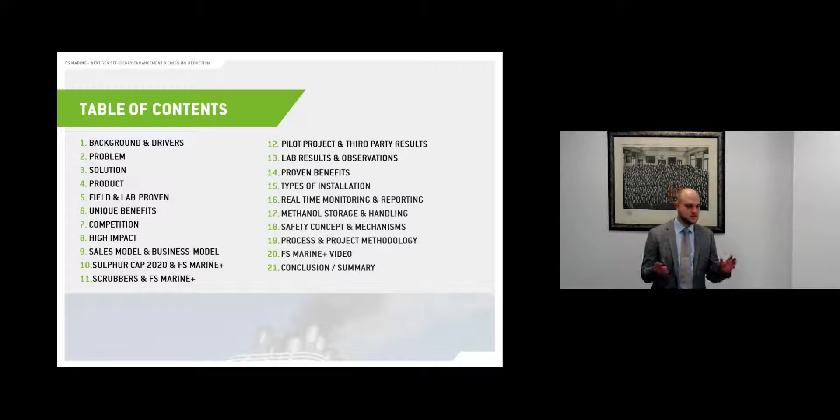The table of content is very long. I'll try to stay within the time budget, and I'll go over some things maybe a little bit more quickly than others.

So this is a brief overview. The application consists of a hydrogen generator in combination with a methanol water injection. We reduce fuel consumption by 10 to 15% - that is a net value, I'll go into the net value calculation later in more detail. We reduce emissions drastically, but you'll get figures later on. We also reduce engine wear and tear, and of course increase the operational profits of our customers.

That's the reason for them to buy it, because shipping companies are green - of course they like to be green, but they won't pay for being green. So it's all about economic aspects. Our vision is to become a leading supplier for efficiency technology retrofits and to establish a sustainable solution that has a clear economic and ecologic benefit for the customer and of course then for us all.

The solution itself can be retrofitted, which is very important to know, because we wanted to create a solution that is available today. We have a fleet of 55 to 60,000 vessels, numbers vary, but that's the range we talk about, and we need retrofit solutions that pay for themselves. Otherwise we're not able to do anything about the existing fleet, because every new build ship is a measure that will take its part in 5 years, but not today.

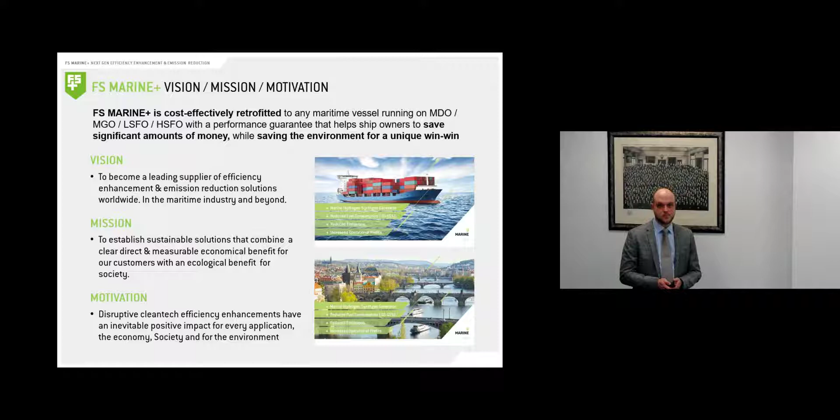Of course, shipping is very important. It's the backbone of global trade. I don't have to tell you that. We have to reduce CO2 emissions due to regulations, and ships have to become more efficient. So that's the regulatory drivers and background.

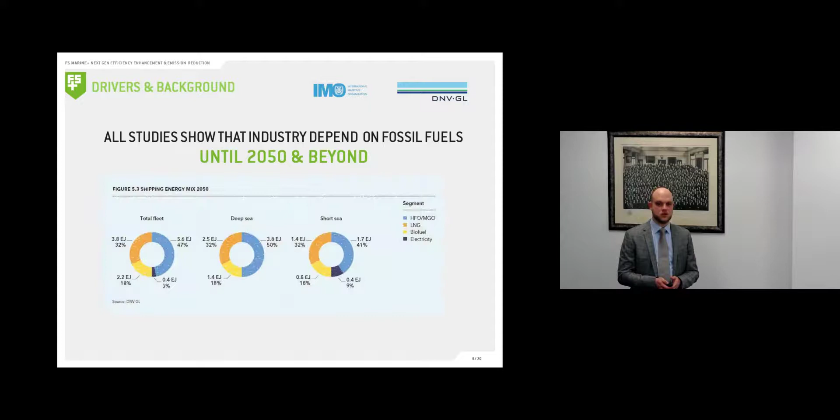I'll talk a bit about the global sulfur cap, just from an economic point of view. Of course, you know all what it's about. Current studies show that in 2050 we will still be dependent in shipping, and every industry, on fossil fuels, meaning heavy fuel will still be part of it. So we need solutions that tackle fossil fuel consumption in shipping today, but also in 20 or 30 years.

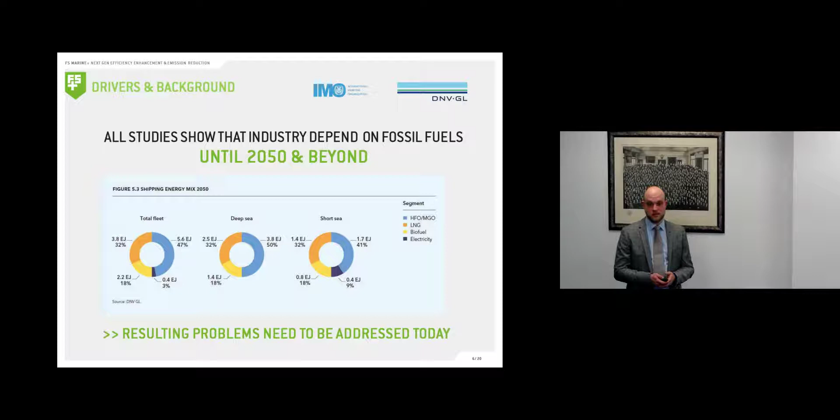So what problems are we addressing? Of course, it's fuel costs. We've seen it in the last months, fuel costs are still rising, which is good for us because our business case gets better every day. We have climate change, global warming, and of course air pollution, which is one of the biggest, maybe even underrated, problems to general health all over the world.

Of course, burning fossil fuel is not a solution to anything. So we want to tackle the problem today, at least improve the consumption or use of fossil fuels on marine engines today.

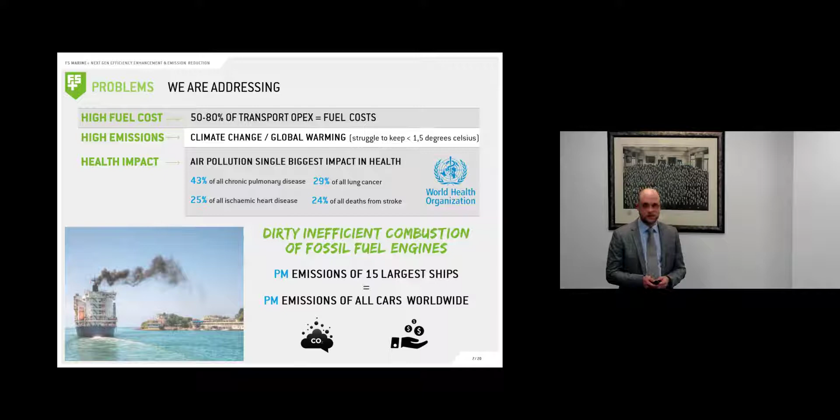So the solution itself generates hydrogen on demand. That's very important, and I'll go more into detail later on. It injects the hydrogen and oxygen together with water methanol into the air intake of the engine, in different parts of the engine. This will most likely raise more technical questions from your side later on.

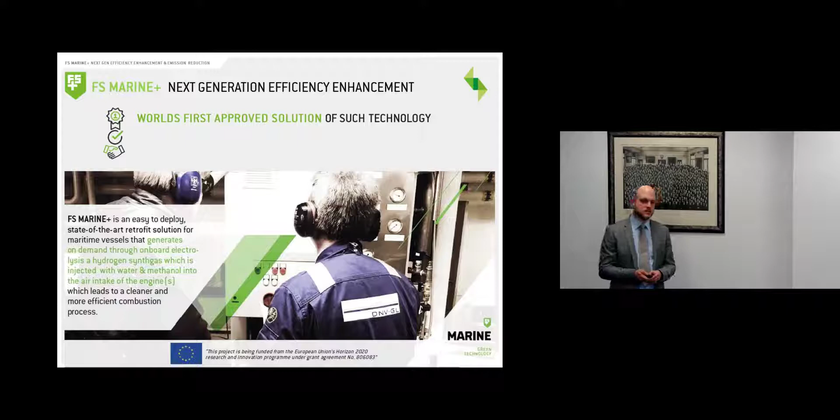It's the world's first approved solution in that regard — DNV GL as class has given us a testing approval for the first time, and for the second time the testing approval has been prolonged. It's of course patented, that's the capital we have beside the solution, patented in over 40 countries now.

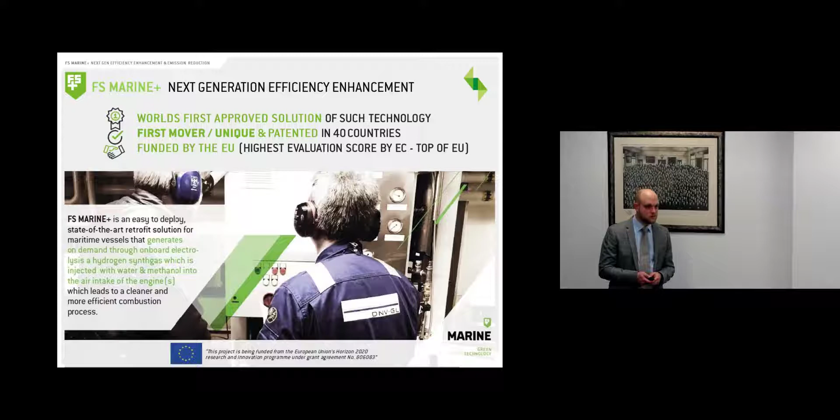And at the end of last year, we received EU funding from the Horizon 2020 program, which is very hard to acquire. Maybe some people here know that. So the interest from the EU side is also generated and valid.

So how does the solution work? As I said, we inject hydrogen and oxygen. The gas is generated via an electrolyzer, a quite efficient electrolyzer, because of course we want a very good energy balance. At that point I have to make clear that we do not replace fuel by hydrogen.

That's one of the questions we normally receive, and it wouldn't make much sense. Everybody knows, of course, if you generate hydrogen by power generated from the engine, and feed that hydrogen back into the engine, it wouldn't make much sense. We only use very small amounts of hydrogen — about 0.1% of the air volume going through the air intake to the engine — to already create very positive effects.

The hydrogen and oxygen is supported by a methanol water injection into the hottest part of the air intake behind the turbocharger, and by that we cool down the air intake temperature. But I'll go more into detail on that later on.

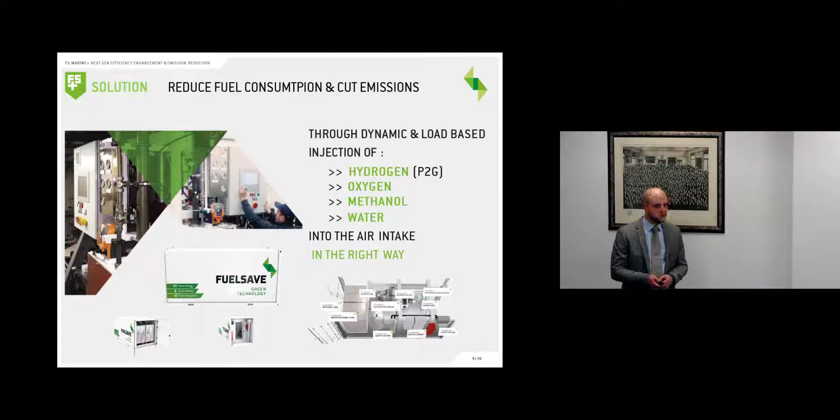That's what the containerized solution looks like, but you'll get an impression of that in the video later on. Of course, the whole system has to be integrated into the ship's network, into the alarm system, ventilation system, freshwater system, and the methanol storage system.

That's what you see on the left side. In the middle are the different parts of the system. We have the security control, or the PLC control, that is controlling all the processes of generation of the gas, injection of the liquid, and the mixture of it. There's also a demineralization unit integrated, because for the electrolyzer we need very clean water — there's probably a better technical phrase for that, but we need very clean water for the electrolyzer.

We have a small intermediate tank where the methanol and water are mixed. Right now we are operating with a mixture of 30% methanol and 70% water.

That is injected via a high performance injection pump into the air intake. So the gas component, the hydrogen and the oxygen, are given into the air intake passively, meaning somewhere near the filter system where we have a low under pressure. The engine takes it in itself, while the liquid has to be injected, because we are in a pressure bearing part of the air intake system.

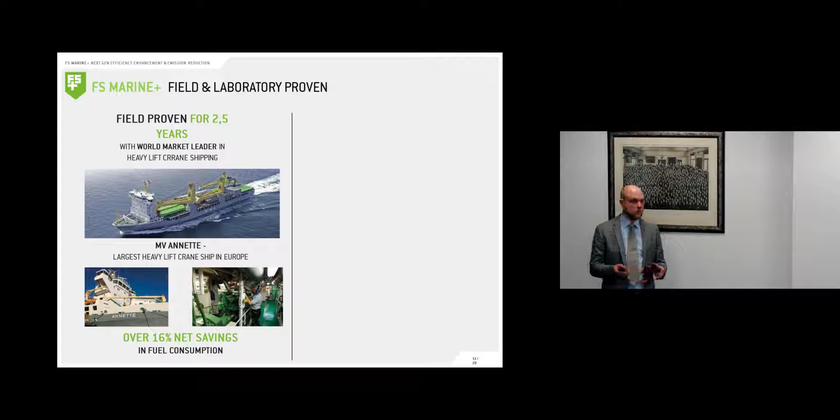The system was installed on an auxiliary setup there, on a Volvo Penta auxiliary engine, and depending on load level and operating conditions of the engine, we had up to 16% net savings in fuel, meaning we had larger gross savings of up to 25% on part load level on that engine. Net savings in this case means really financial net savings, meaning we've taken into account the consumption of methanol, the consumption of power, even we balanced the consumption of water. So all operating materials were taken into account, and we had really great results to go on.

The solution was also tested, the working principle, not the system itself, but the working principle of using hydrogen, oxygen, water, methanol on a combustion engine, was tested at the University of Rostock. They have their own institute for the industry, which is called FVTR. It's quite renowned in Europe, one of the marine centers in Germany. So the bigger engine manufacturers like MAK, MAN are testing their oil additives or injection systems there. We went there and had our working principle of the solution also approved and validated.

The biggest benefits for our customers are, of course, the fuel savings. In the end, it's about money, and we can contractually guarantee 10% OPEX savings. That is where we are positioned now, and where we create the interest on the customer side. As we have very good results on different applications, not only on ship engines, but also on truck engines and even on biogas plants, we can guarantee the customer the ROI.

This is a brief overview of the net savings and the emission reduction potential that we have with the solution. We have already spoken about the net fuel savings, up to 16%. We have SOx reduction, of course, in the same amount as we reduce the fossil fuel, so this is 10%, and by replacing a little part in the energy balance of the fossil fuel, HFO or MGO, by methanol, we can reduce the SOx by up to 20%. Of course, this is not enough to meet the requirements for Tier 3 or to replace the scrubber, but it's a good value for itself.

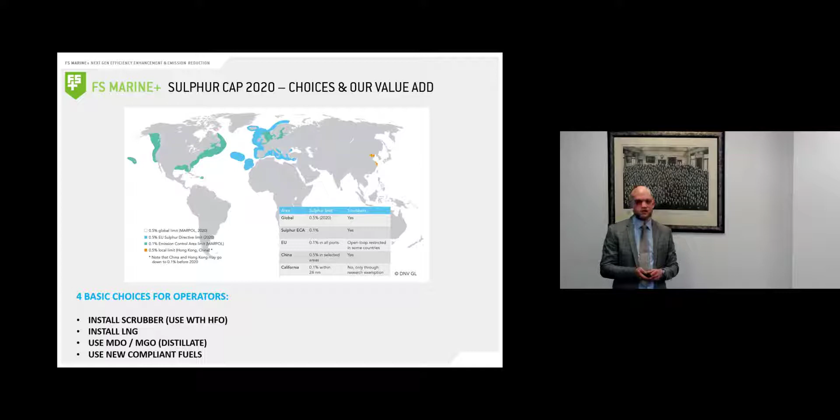You all know the Sulfur Cap 2020. I'll go through this quickly because it's more related now on the customer side. But as we know, you don't have many options to meet the requirements. Either you buy a scrubber or you use low sulfur fuel oil. These are the two options you have, or you just do nothing and wait and see what happens.

Yesterday I was at the tanker and shipping conference, and many people are laying back and just waiting to see what happens with 2020, because there's a big uncertainty about prices. Nobody knows the fuel prices.

And also everybody knows a scrubber has a tendency to increase fuel consumption. So it's not an economic solution in the first part. It also has many costs and maintenance costs later on.

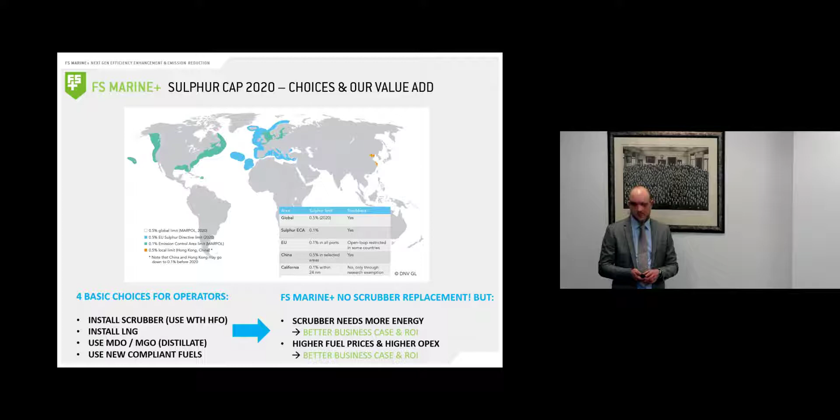For our solution, it doesn't matter which way the customers go, because we already start at the point where the costs are created, which is the consumption of fuel itself. So if you use HFO with a scrubber, distillate fuel, or low sulfur fuel, our solution works with any kind of fuel, any kind of liquid fuel. We even have positive effects on LNG engines.

Especially in the reduction of methane slip. Everybody knows that methane slip is also one of the biggest unhealthy factors regarding LNG. From my personal point of view, that's the reason why LNG cannot be part of the solution for shipping in the future.

Scrubbers can actually benefit from our solution, especially a closed loop scrubber - we all know what an open loop scrubber is. If we go for closed loop scrubbers, if we reduce the amount of exhaust gas and the amount of emissions that have to be cleaned by the scrubber, then we could reduce the wastewater treatment unit and make a scrubber less expensive, a little bit smaller, and in that regard have a better ROI if you anyway plan to invest in a scrubber.

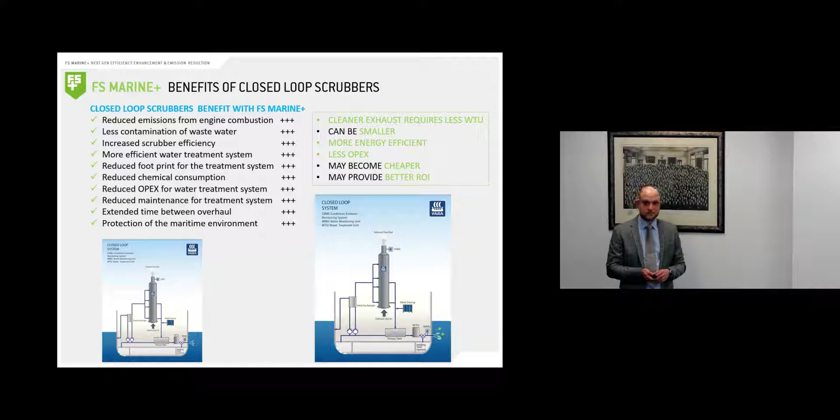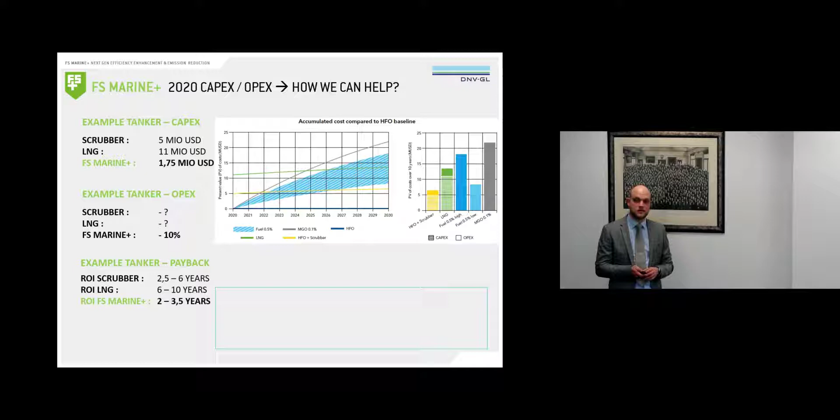Okay, I think we have to speed up a little for the first part. So it's just what I said - a scrubber costs money, and the return on that money is uncertain because you don't know what happens to fuel prices in the future. While an investment in our solution, you can always guarantee an ROI, so there's no uncertainty no matter which way you go in the future.

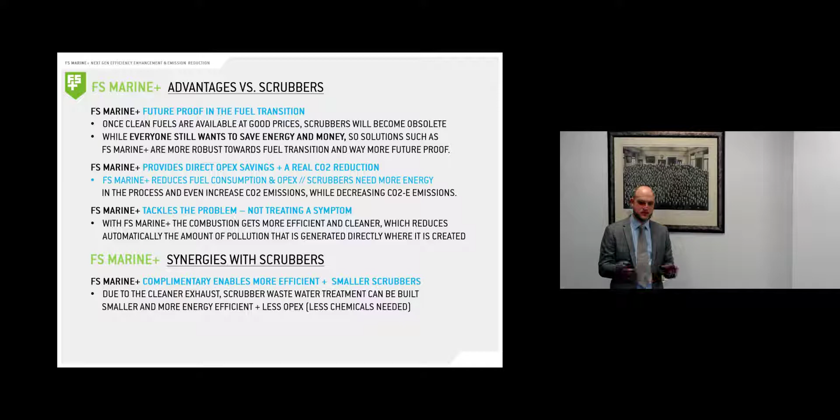In general, only one sentence on that - we tackle the problem: the generation of emissions and fuel consumption at the combustion itself. Every other system is just treating the symptoms.

Actually, to be honest, maybe I'll skip the video. It's fine.

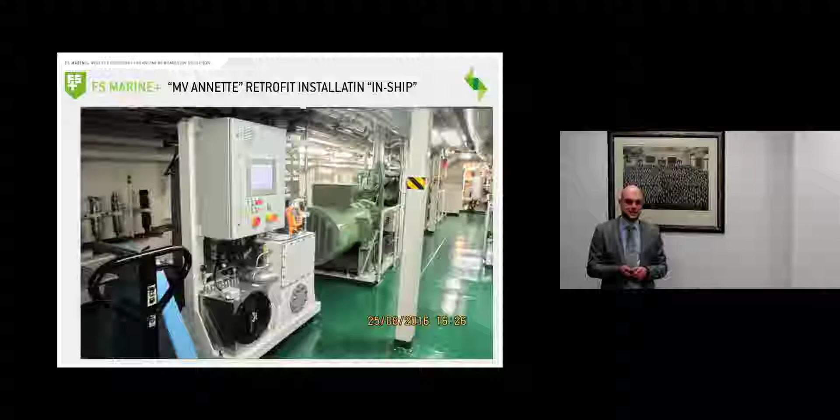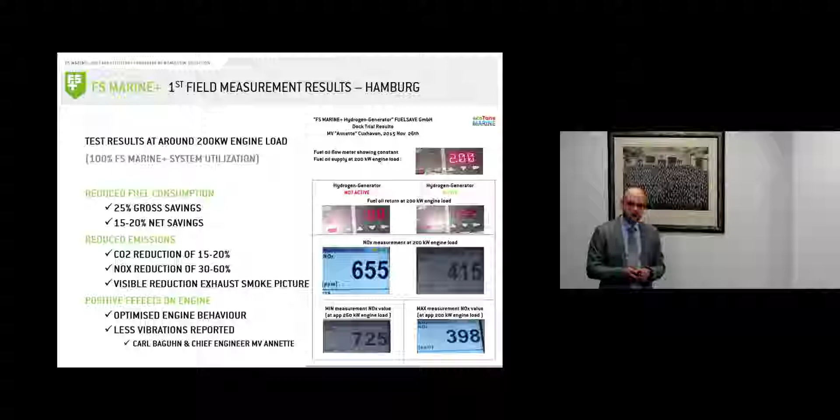This is a short overview of one of the first testings we did in real operation on the ship. We had 25% gross savings and about 16% average net savings. We also did, of course, emission control and emission monitoring. We had a huge reduction of NOx and CO2 in accordance with the fuel reduced.

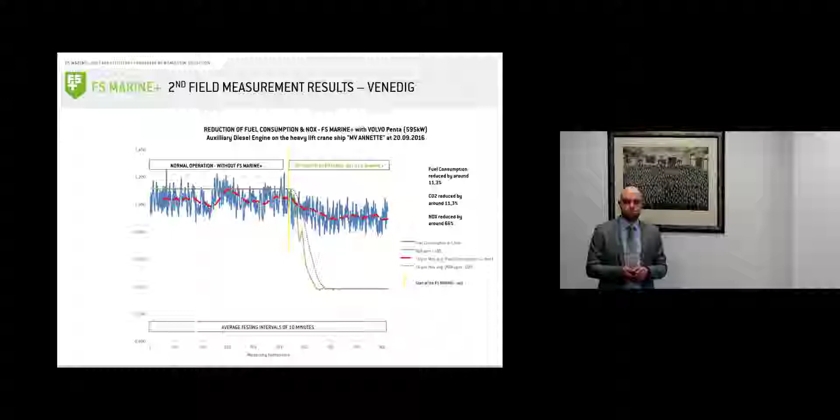This graphic shows the improvement of fuel consumption when the solution was activated. At that measurement we had about 11.3% in fuel consumption improvement and 66% in NOx reduction.

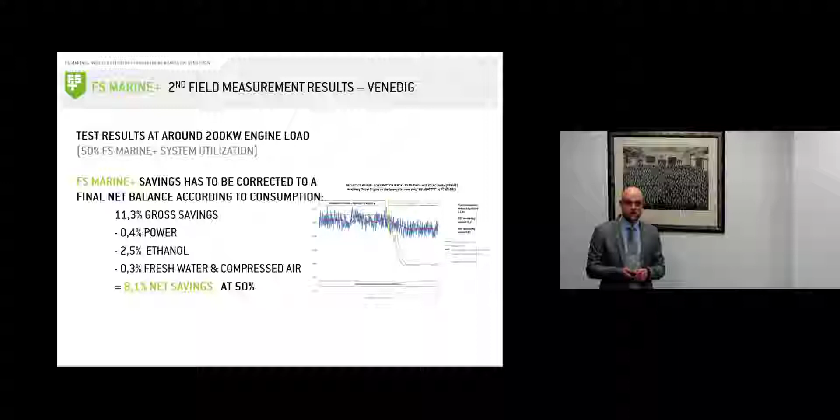We also did oil analysis, which is quite interesting. The oil on this engine had to be changed every 500 hours due to fuel intake into the oil, fading its quality. After our system was installed, the oil quality improved after only 50 hours. So the oil could be used for more than 3 times the original interval of 500 hours, meaning it was used for 1500 hours and was still okay.

Not perfect anymore, but still good. As you know, the oil shows the operating condition, the inside condition of an engine. That has proven the positive effect of the hydrogen by cleaning

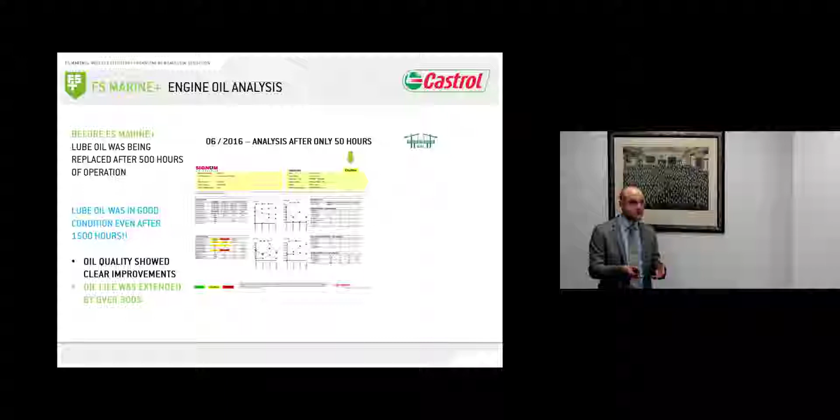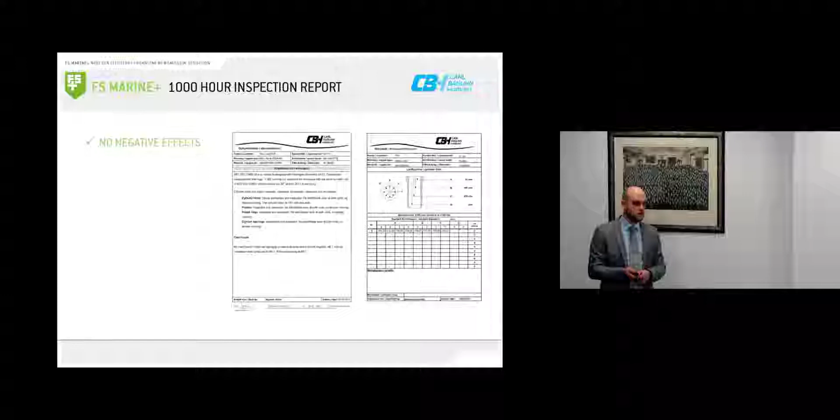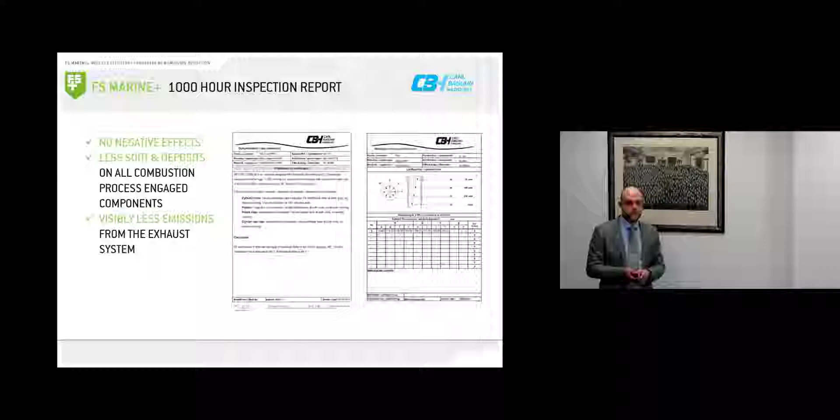almost all residuals, all combustion residuals inside the engine. This has been verified by an inspection from Carl Baguhn, the Volvo Penta servicing company of the customer. They opened up the engine, did the inspection as usual, and saw no negative effects on the engine, but tremendously reduced soot and deposits inside. The engine looked like new from the inside, and of course there were visibly less emissions from the exhaust, with reduced black carbon.

That is a statement out of the inspection report: cylinders look like new. Here are some pictures, maybe they are more convincing for you as technicians. For me they look good, but I think you have a different view on that.

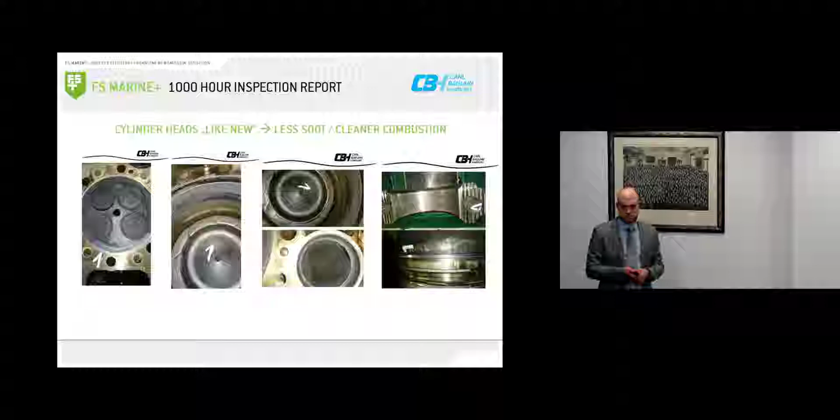That is what the engine looked like from the inside after about 1000 hours of operating our system. And nothing was cleaned, it's like it was opened up.

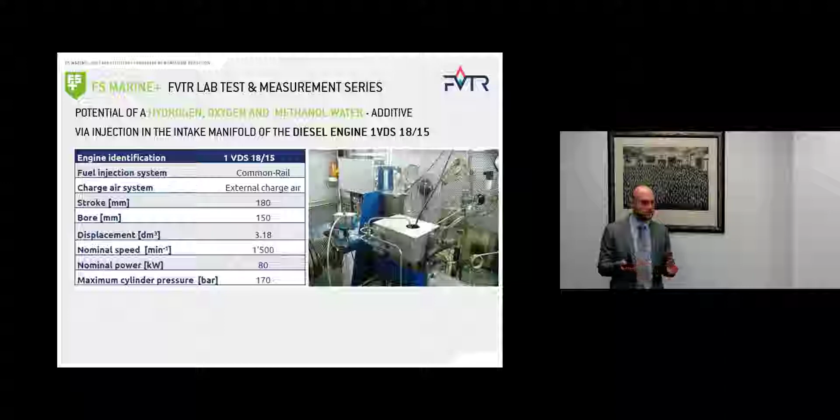We also did laboratory testing, as I already explained. That has been done on a single cylinder unit at the University of Rostock. Maybe the figures are more interesting for you. The single cylinder was a 80 kilowatt engine.

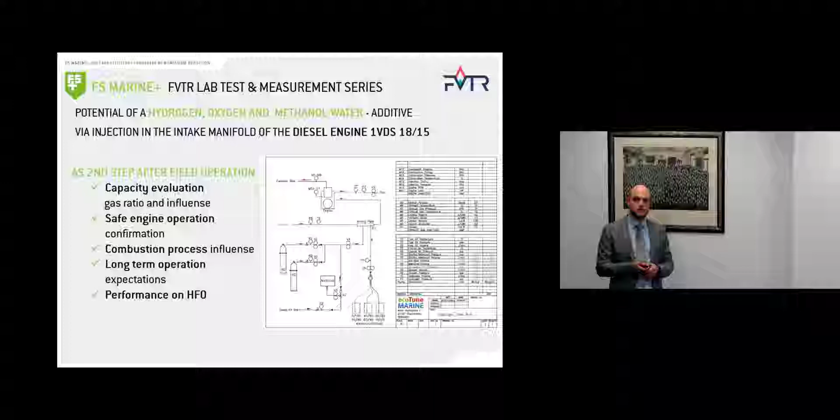We tested the working principle, meaning we had no system there, but the oxygen and hydrogen came from a bottle, and methanol and water were injected. We tested it on a huge range of different operation points of the engine, and tested it also to extremes—what happens when we inject much hydrogen, less hydrogen, only oxygen, in combination with different ratios of oxygen and hydrogen, also with the water and methanol.

So for us it was kind of a development boost. We could test many things that we could never have tested on a customer engine.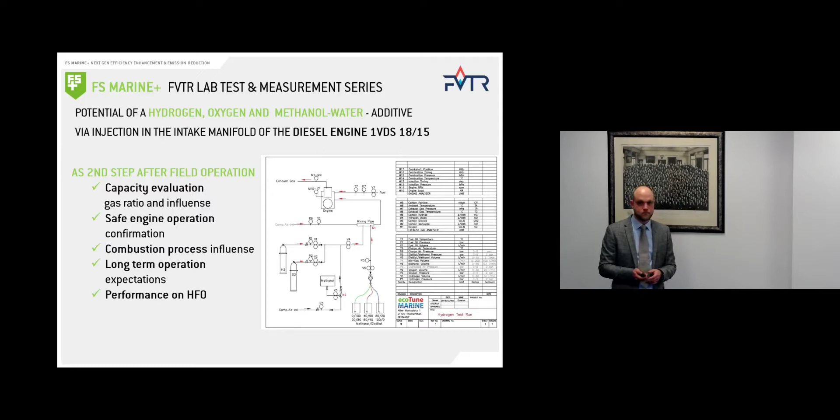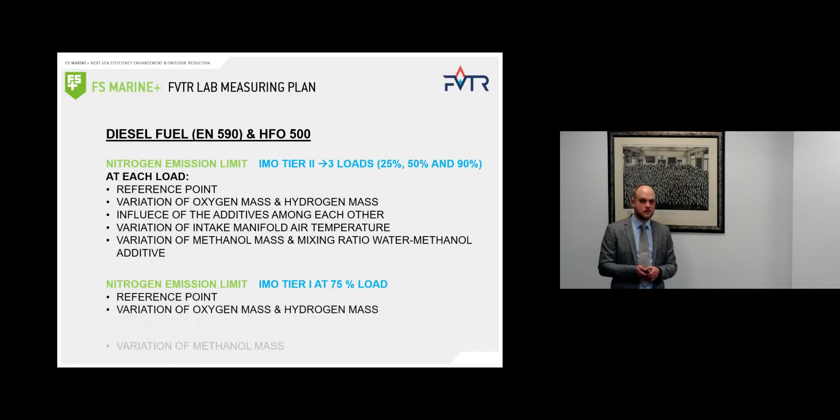So we had variation of oxygen mass and hydrogen mass, with a fixed set point in the beginning, and we tested the whole range of different mixtures over that one set point.

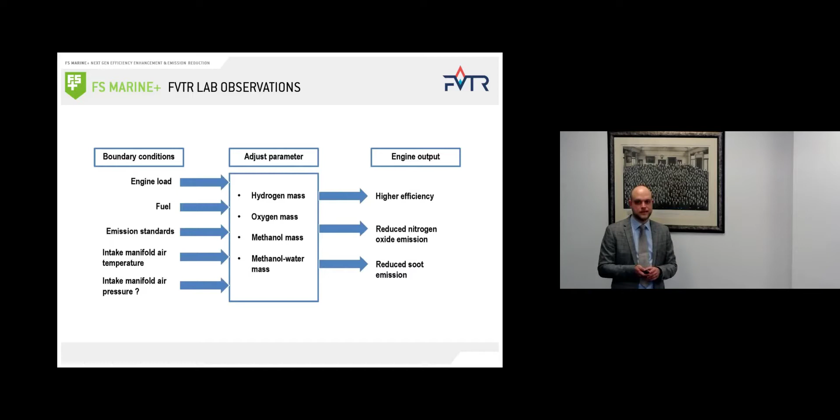What has been observed? I know this is very technical, I'll come to the conclusion right away.

We had reduced diesel consumption, of course, reduced nitrogen oxide, reduced filter smoke number, as described in the beginning. We had reduced intake manifold air temperature, up to 50 degrees, which has very positive effects on the efficiency of the engine. We also had increased indicated efficiencies. So all the tendencies from real operation in that regard were confirmed.

Not to that extent as in real operation, but as far as we know, there seem to be quite differences between single cylinder operation and full engines in real operation.

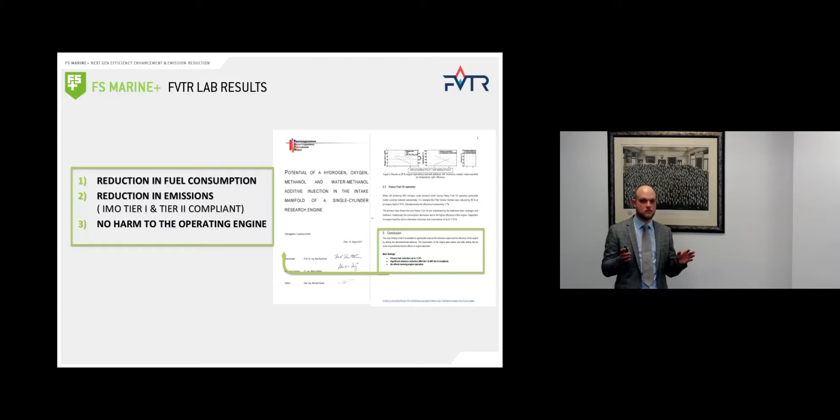For us, most important because it was relevant for the approval of the prototype, and of course for future installations, that we had no harm to the engine, meaning no increase in cylinder pressure or combustion pressure.

So a brief overview of all the proven benefits, or our conclusions from the real operation experience that we made: we have reduced fuel consumption, drastically reduced emissions, reduced wear and tear due to better, cleaner operation inside the engine, we have reduced lube oil costs where it is relevant, and no harm to the operating engine.

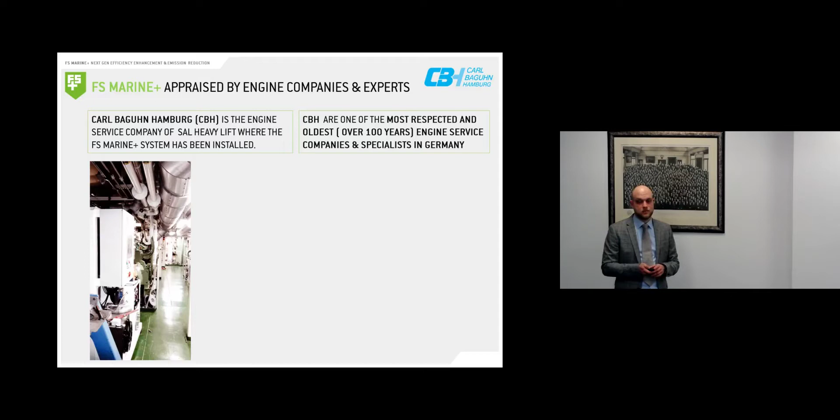So the current customer was so satisfied with the prototype installation that they decided to go for a 4-ship installation. That project has already started in designing and approval, and will begin in April. We hopefully finish the first commercial installation in April 2019.

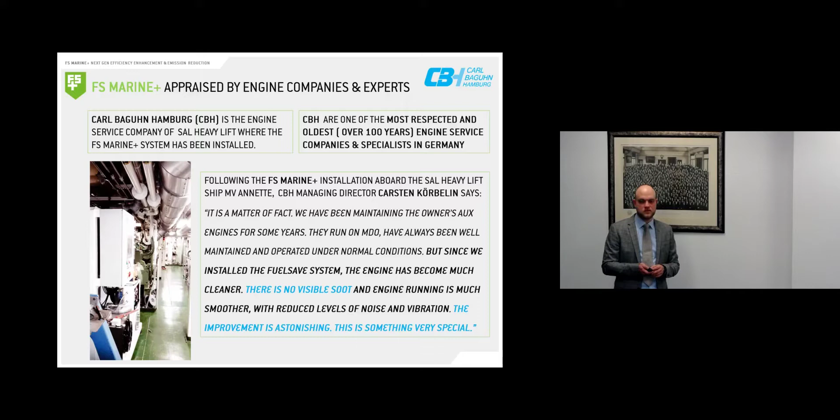This again is the conclusion from Carl Baguhn Hamburg, the servicing company for that auxiliary Volvo Penta engine. I'll go over this quickly.

We have 2 installation options. In-ship installation, of course customized inside, meaning the methanol storage is also located inside the ship. And we have the container solution that you have seen in the video.

Design is finished for the units, but we're still in the approval process. And what I may say today is, of course, the engine manufacturer had to be involved in the process because we are going for the main engine, the propulsion engine. I can say that one of the biggest German manufacturers is supporting the project now.

It took some time to convince the people, but they are doing their part of the hazard analysis for the approval process, so we can now really proceed with the support of the engine manufacturer on the installation.

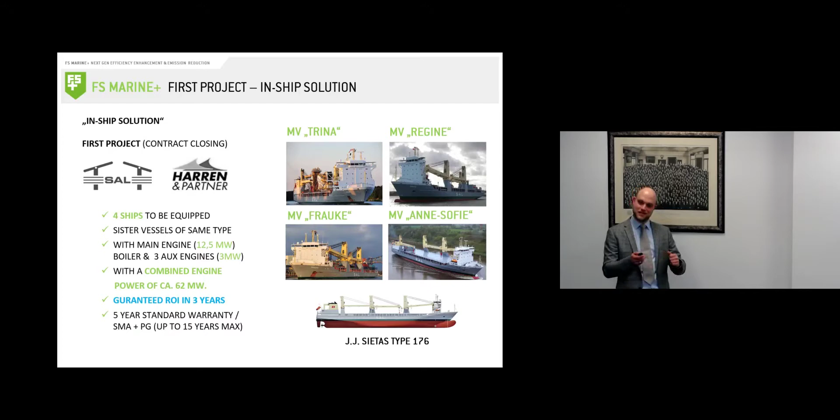That's a question, normally the first question we get. The first one is, are you replacing fuel by hydrogen? And the second one is, okay, if it works, what does the engine manufacturer say?

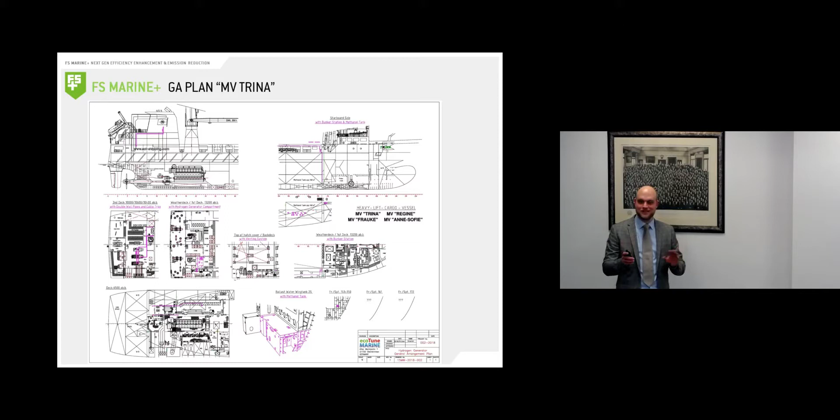So, who's familiar with the general arrangement plans here? Who is the electrical part inside here? Okay, so I can only show the picture. It's a sample installation for one of the 4 ships. I think maybe it's too small anyway. So it's part of the design.

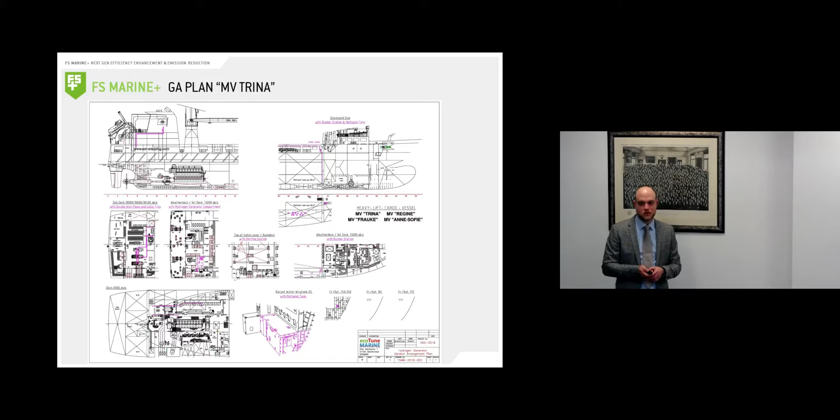We also, for the same customer, have a container installation for an auxiliary setup. For us, let's say the container prototype version. This will be installed on the MV Paneco, which is a Caribbean ship.

And what we have seen in the video is really the actual container. It's real, we build it that way. And this is going to happen also within the next 2 to 3 months. Some more arrangement plans showing where the container is positioned on the ship, so it's in the back of the ship.

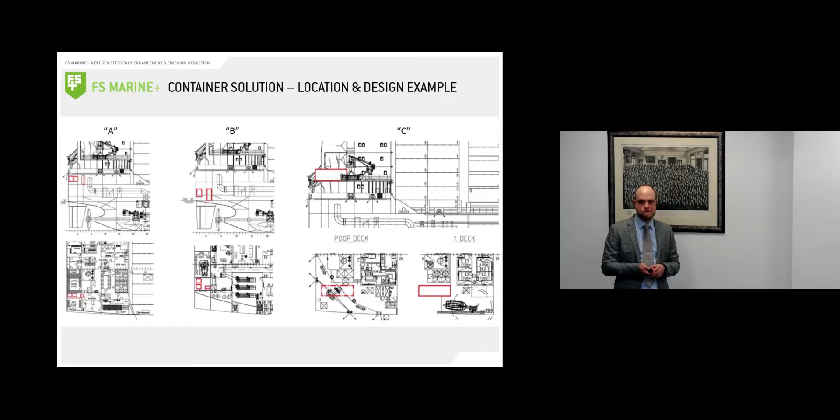So we see the container as the future solution because the container is more flexible to be used on different ship types. It won't work on every ship type, that is clear, but it makes the approval process easier for us on one hand. Of course, we can improve the cost ratio for the unit, and as I said, we can put all the hardware into one container, so we're very flexible with the container unit to serve almost every ship that is viable for the technology.

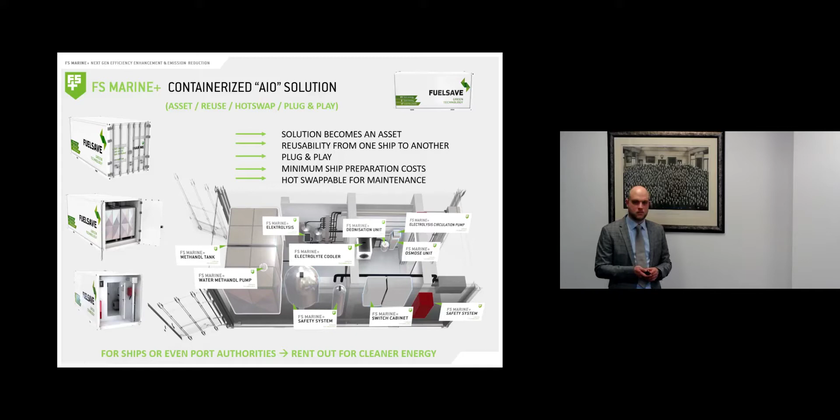Of course, we have to validate our savings to the customer, because that is what we promise and what we do. So the hardware that we build is accompanied by a solution that is not our own, but one of the top market solutions for collecting the relevant data. Because we experience that most shipping customers do not have too much measurement systems; many don't even have anything at all.

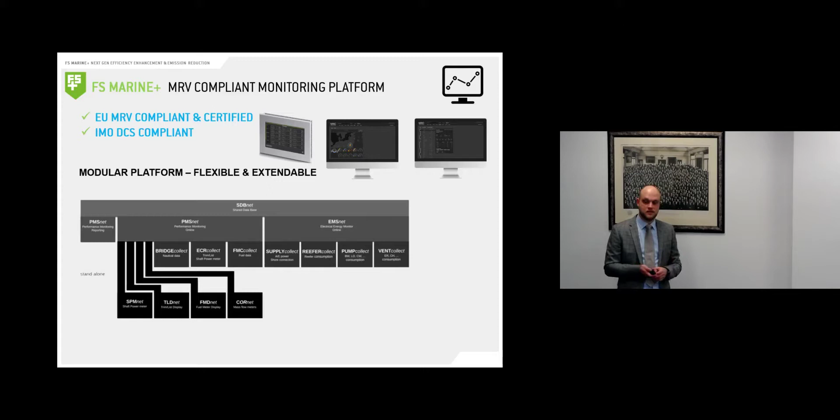So fuel consumption is like this per year. But as we want to validate, also for further development, all values from the real operation, we're going to monitor everything: shaft power, fuel consumption of the engine, all operating materials from our system, power consumption of the important parts, and also the trim and the list.

All this data is aggregated, and we have real-time operation data about our system and about the behavior of the main or the optimized engine of the customer, and we can use and provide all this to the customer and use it for further development and optimization of the system according to the engine operation and behavior.

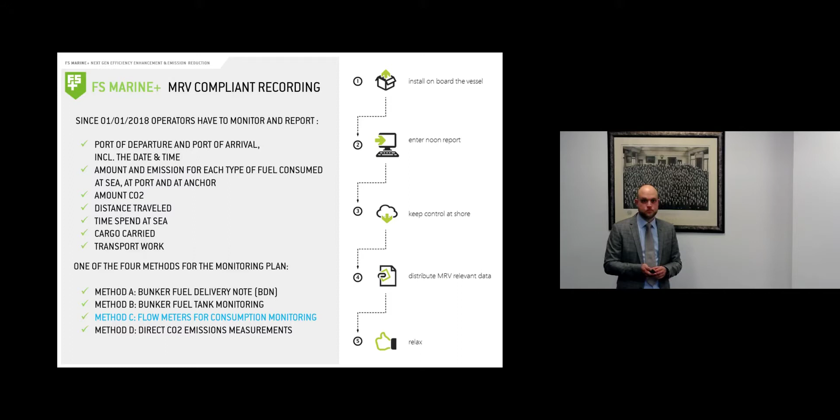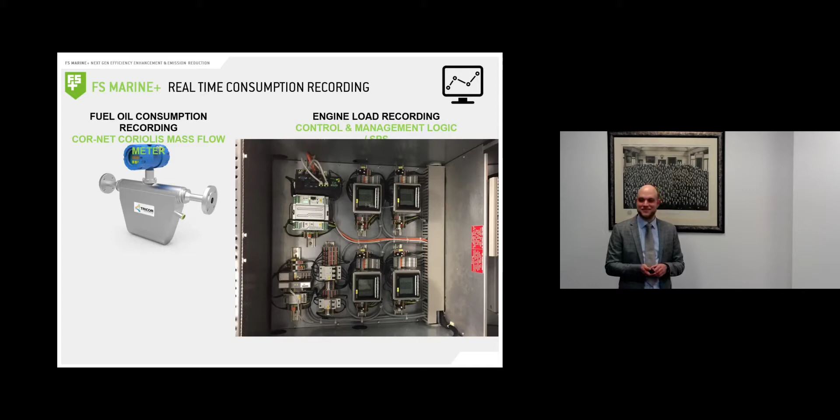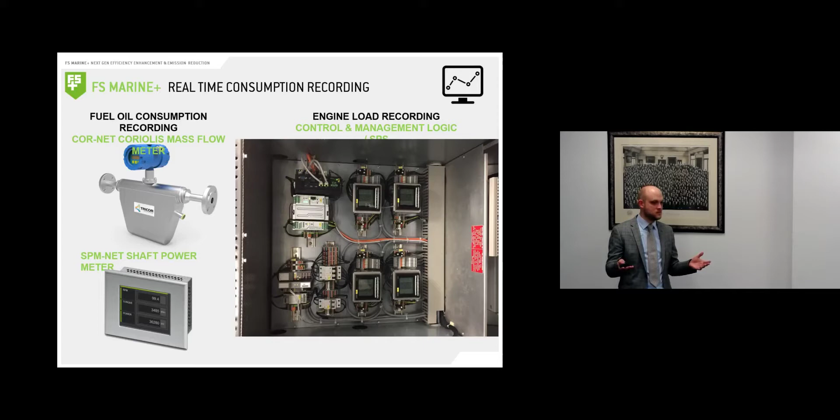Of course you all know what a Coriolis mass flow meter is, better than me maybe. So one for the shaft power and one for the fuel consumption, which are the two most important relevant data we need, because otherwise you cannot validate any fuel savings. If you don't have the shaft power or the operation mode of the ship, it gets difficult.

We're working here with an MRV-ready certified solution from MAG. It's also a German supplier.

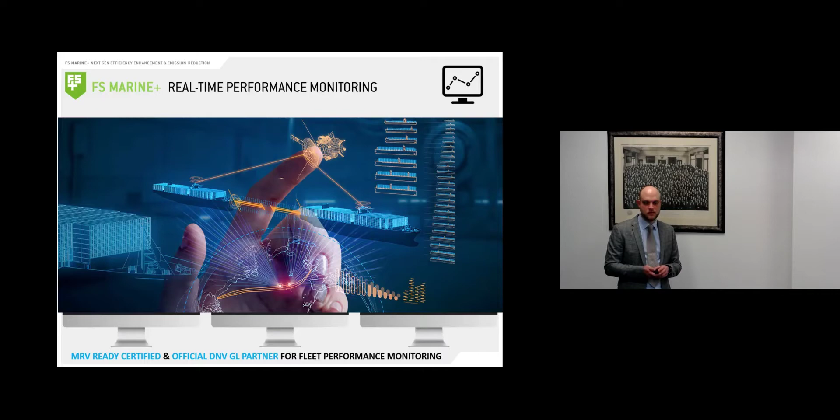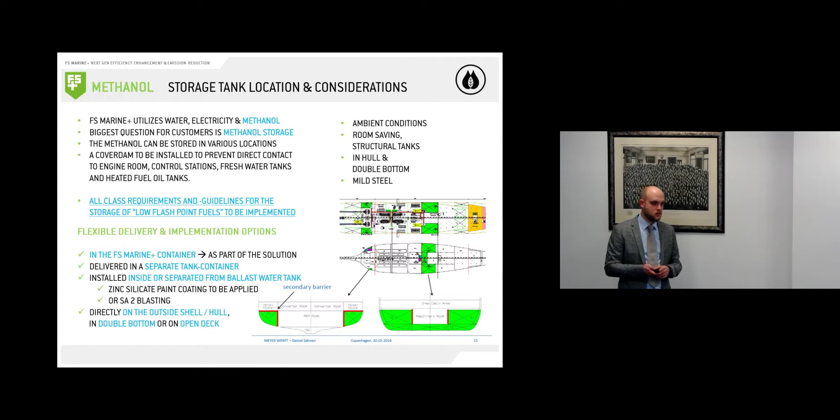I will go over the methanol aspect quickly. Of course, somewhere in the ship, the methanol storage or methanol compartment has to be installed. We have several options on that, and we already designed several options for several customer inquiries. Until now, we normally found a good location for the methanol compartment, in void space or in refurbishing one of the existing tanks, or with a container with a separate methanol tank container or bunker containers.

Methanol is actually available everywhere in the world. It's one of the most carried commodities. The only difference for shipping is that methanol is not really used as a fuel yet - I think there are only about 7 ships running on methanol. But it's available in every port because it's handled and stored in every port. For the customers, we already researched the market - it's not a big issue to get methanol supplied on board.

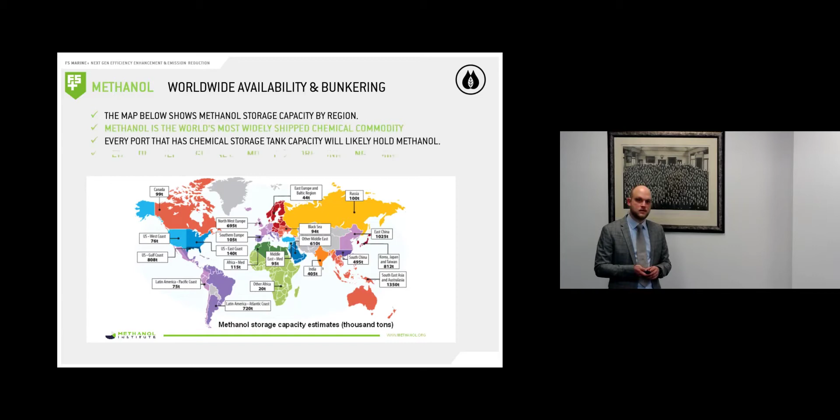It's delivered via truck, and the price of methanol is actually pretty close to the price of HFO. So there's a direct relation between the two - nobody knows why, because there's no technical reason for that, but the prices are almost the same. So in our calculation, when we use a ton of methanol instead of heavy fuel, we're always on the safe side to say it's about the same price. The price has actually even become a little bit better than HFO.

So it's not too cheap, it's not too expensive, it's cheap and available. For us and the customer, that's one of the most important aspects of installing the unit, because methanol is needed, but it's available and not too expensive.

The safety concept is very complex to a certain regard because the DNV GL is requiring a lot. We fulfill it - because there is no IGF code for methanol yet, we have to fulfill the IGF code for LNG at the moment, meaning double piped installations, a lot of valves, and of course control of all processes at all times, and many risk scenarios, more or less real, but that's part of the HAZID.

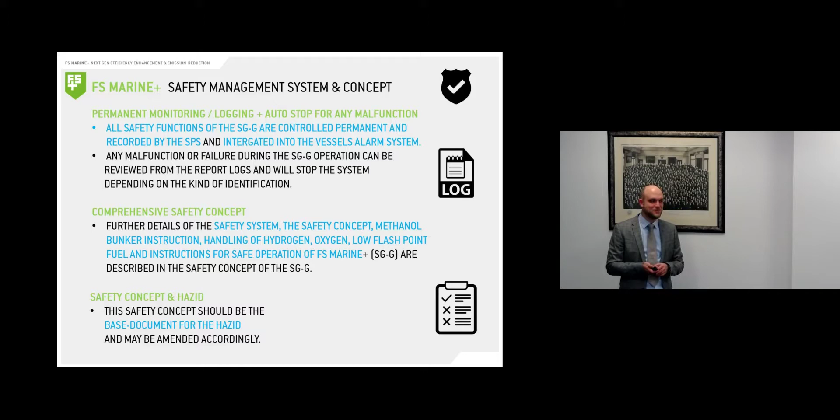That's part of the safety checks, but I won't go through all of that - we know what we're doing. The safety setup is where most of our knowledge also is, besides the mixture and the relations of the additives. It's been a long way to go with the classification society to come to a security concept that is accepted, and it's a really high-level safety system now, taking into account every possible scenario. The engine manufacturer will also bring some new details, and in the end we have a very secure setup, as secure as possible.

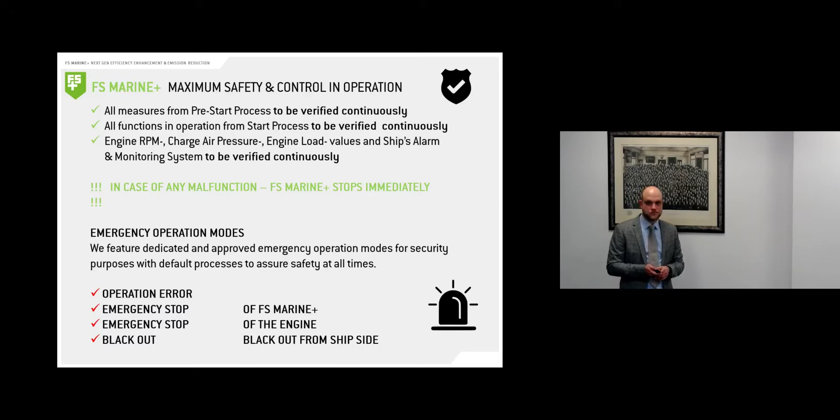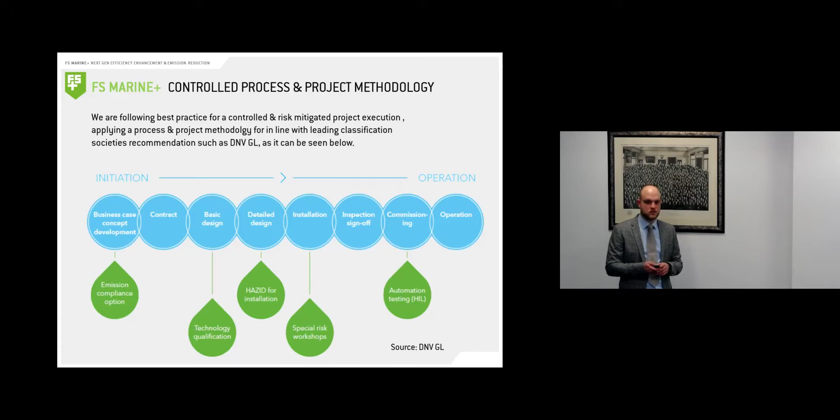We have a controlled process for the project according to leading classification companies like DNV GL, in regard also to the HAZID, the design of the unit, and also the support and inspection afterwards.

I think that's the point where there's a break. So, any questions?

So just one thought - you did a test on the engine trial by injecting hydrogen, oxygen, and methanol at different points, different ratios. So what was the effect of hydrogen on this?

What was the difference? Hydrogen actually, when you look at it alone, is mainly a cleaning component, meaning it is the main factor in reducing NOx as a standalone. On the other hand, oxygen is more pushy - if you have more oxygen in the combustion, you have a pushed combustion process, you push the efficiency, while hydrogen is more on the emission side. What is very important is that it only works in the mixture of both. If you use hydrogen - because every engine manufacturer has tested hydrogen, and of course also oxygen - they never came to a good result, or not an economic result, because you cannot push the combustion on one hand very far to be more efficient and have fuel savings.

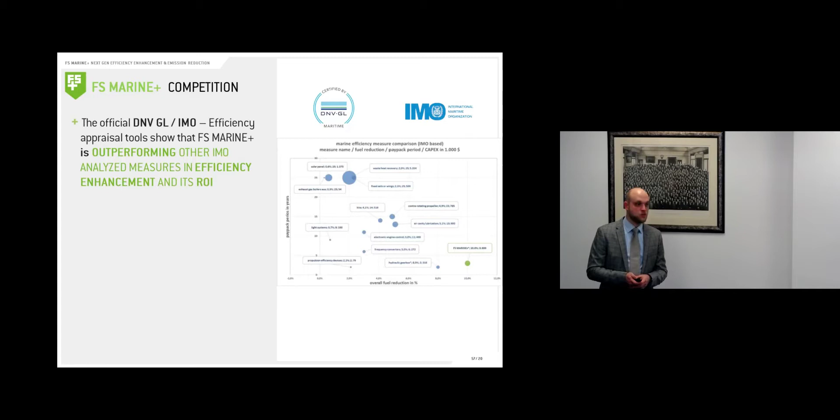This is more the commercial part of the presentation. We did an analysis with the IMO tool - maybe you know it, it's an energy efficiency enhancement tool advanced. It compares several technologies available on certain models and types of ships. We did several calculations with that, with our real operation data and our own experience, and it seems to be the most cost-efficient technology available at that large scale. I'm not talking about LED lamps, which of course have a very short ROI, but at large scale we have the most economic solution available.

Just quickly, yeah, it's field tested - it's the world's first solution in that way. It's possible to retrofit, and we can guarantee an ROI. I think we are the only solution that can really guarantee an ROI to the customer contractually. So that's the most important USP, especially for a new technology coming into the market.

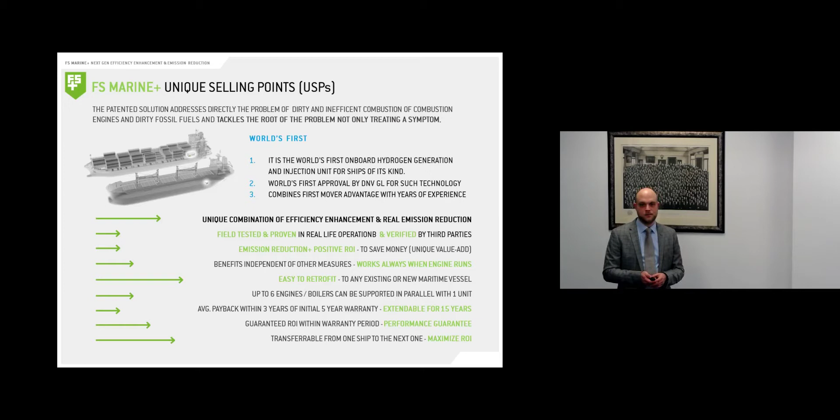Of course, we also have side cost reduction when it comes to energy consumption for cooling down, for air intake cooling, which is done electrically. We already have, as described, cost reduction in maintenance and lube oil costs. So in total, we are very confident to guarantee the 10% OPEX savings.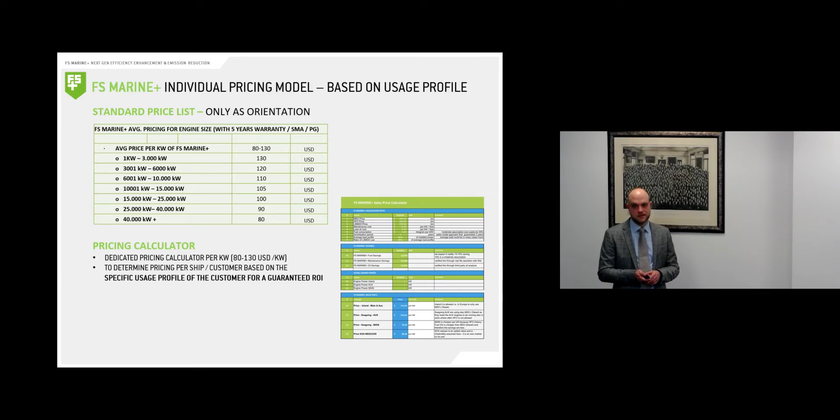We plan to offer 3 different sales models with customers. The one is a normal purchase, which is very uncommon in shipping business - that's what we have learned. So it will go more into the leasing or BLT model. That's actually where we do the finance for the customer, of course with partners together. The third interesting, risk-free option for customers is that we only go for a profit share model, meaning the customer only pays out of his real net savings. The customer doesn't have any risk, doesn't have to pay any money, and has a positive cash flow or improved cash flow and operational profits from day one.

Of course, large numbers. It's just an example. If you have a customer with 9.5 million US dollars of fuel cost per year, if he saves 10% in total in OPEX regarding fuel costs, in this case it's a bigger engine of course, and then we have a quite short ROI of 2.7 years.

What we learned, or the feedback from customers and potential customers, is everything up to 3 years is okay, at least it's attractive enough to think about it. Because anything else with longer ROIs, most of the technologies that are available and working and good, doing something good, cannot meet the requirements for the economic aspects. They cannot meet the ROI requirements shipping companies have.

That's for the greenhouse gas emission reduction potential. Due to the lack of time, I'll go through this quickly. Of course the reduction potential is large, even huge. If the system is installed on many or all ships, we can drastically reduce nitrogen oxide, NOx, and black carbon. And we can at least do our part for sulfur oxide reduction and saving fossil primary fuel.

We have been a bit recognized up till now, a little bit awarded also. Besides the EU funding, we were also shortlisted on the Green Tech Awards in 2017 in Germany, which is one of the bigger, more renowned green technology awards in the world.

As a conclusion and summary, the system is funded by the EU. We had a very high score in the SME instrument, one of the highest, or even the highest from that call in 2017.